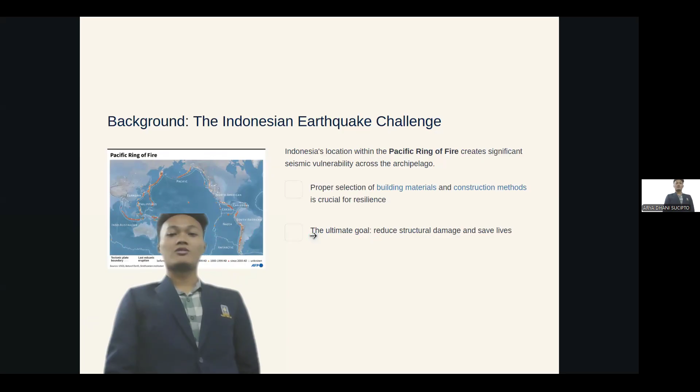Background: Indonesia's location within the Pacific Ring of Fire creates significant seismic vulnerability across the archipelago. Indonesia really has the most heavy earthquake challenge. So the proper selection of building materials and construction methods is crucial for the resilience of buildings, and the ultimate goal is to reduce structural damage and save lives.

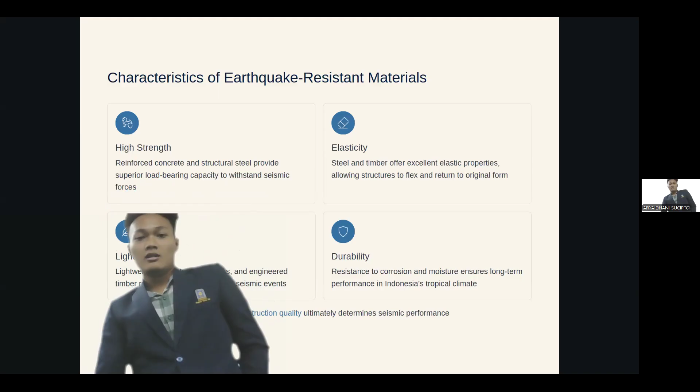The characteristics of earthquake-resistant materials: First, high strength. Reinforced concrete and structural steel provide superior load-bearing capacity to withstand seismic forces. Second, elasticity. Steel and timber offer excellent elastic properties, allowing structures to flex and return to their original form.

Third, lightweight. Lightweight concrete like AAC blocks and engineered timber reduce inertial forces during seismic events. And the last thing is durability. Resistance to corrosion and moisture ensures long-term performance in Indonesia's tropical climate.

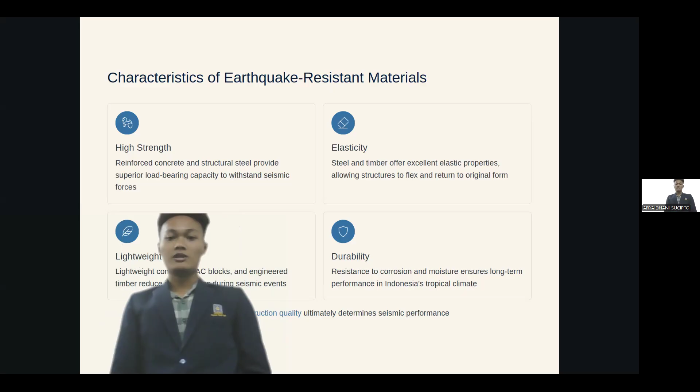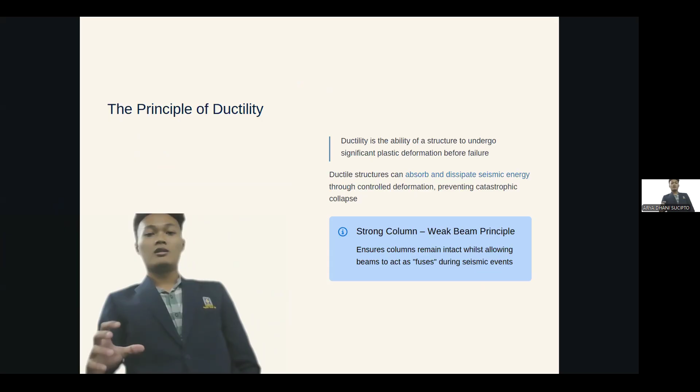The principle of ductility: it is so important in reinforced concrete buildings to have the strong column, weak beam principle. It ensures columns will remain intact while allowing beams to act like fuses during seismic events. Ductility is the ability of a structure to undergo significant plastic deformation before failure. Ductile structures can absorb and dissipate seismic energy through controlled deformation, preventing catastrophic collapse.

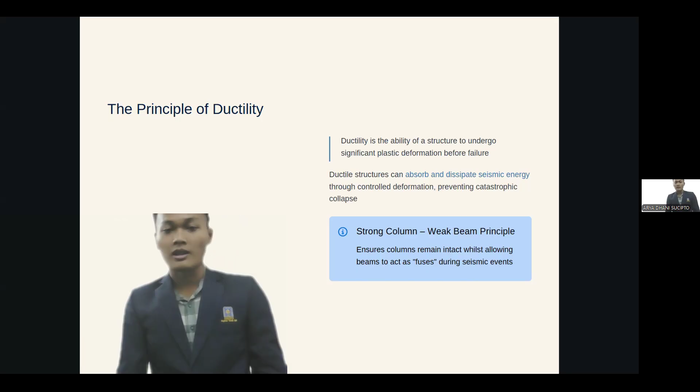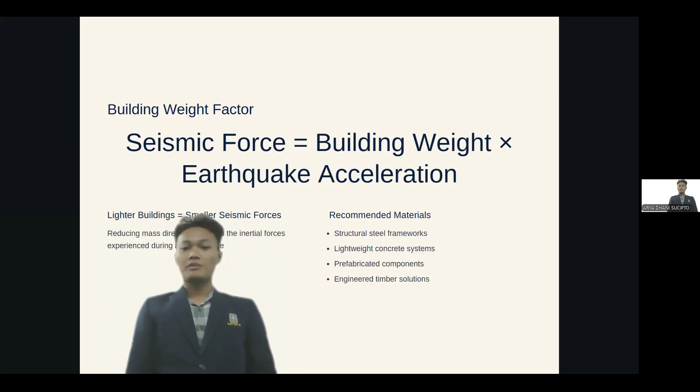Building weight factor: this equation shows the seismic force is equal to building weight multiplied by earthquake acceleration. So the lighter the building, the smaller the seismic forces. Reducing mass directly decreases the inertial forces experienced during an earthquake. So they recommend materials to reduce seismic forces, such as structural steel frameworks, lightweight concrete systems, prefabricated components, and engineered timber solutions.

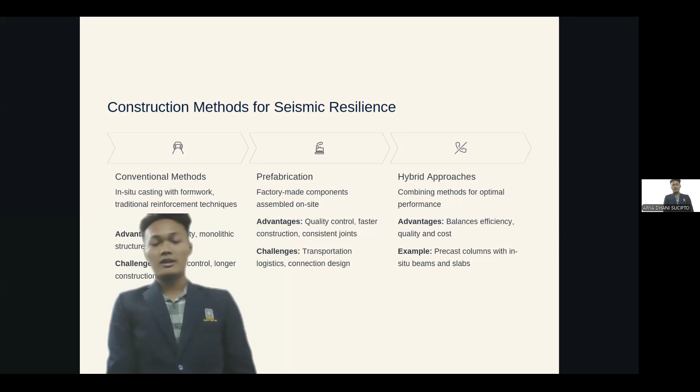The second method is prefabrication: factory-made components assembled on site. The advantages of this method are easier quality control, faster construction, and consistent joints. But the challenge is transportation logistics—it needs special transport to distribute these materials, and it has difficult connection design.

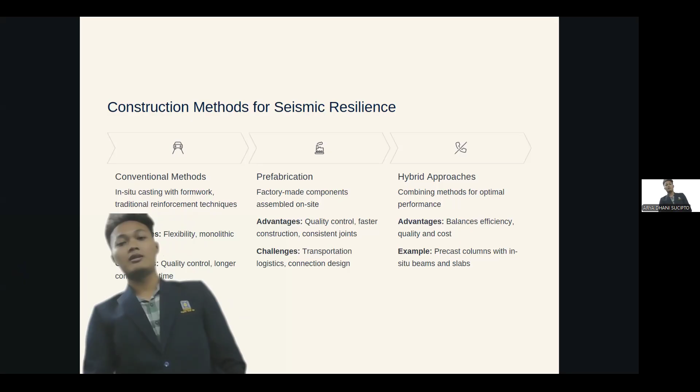And the third is hybrid approaches. It combines methods for optimal performance. The advantage of this method is balanced efficiency, quality, and cost. For example, precast columns with in-situ beams and slabs.

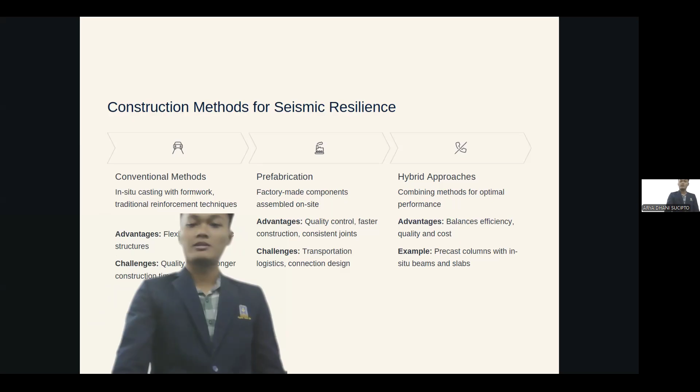Next, critical construction aspects. In Indonesia, we call it the BMW principles. B stands for biaya, or cost, which contains budget constraints. M stands for mutu, quality, material, and workmanship standards. And W stands for waktu, or time, which contains construction scheduling.

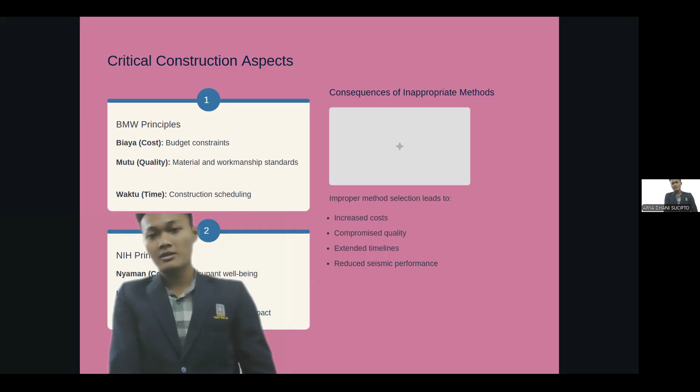And then the NIH principles: N stands for nyaman, comfort. I is indah, the aesthetic aspect. And H is hijau, sustainability and impact on the environment. Consequences of inappropriate methods: improper method selection leads to increased costs, compromised quality, extended timelines, and reduced seismic performance.

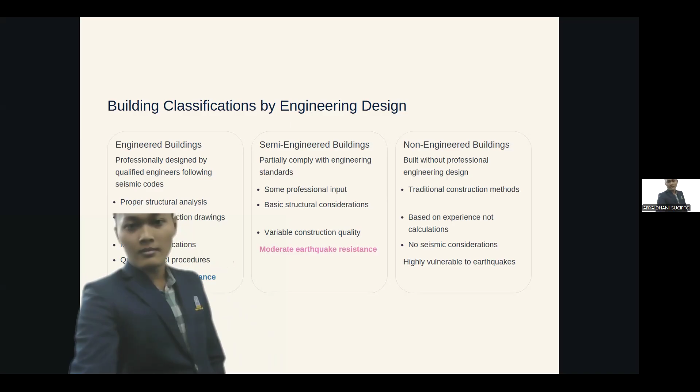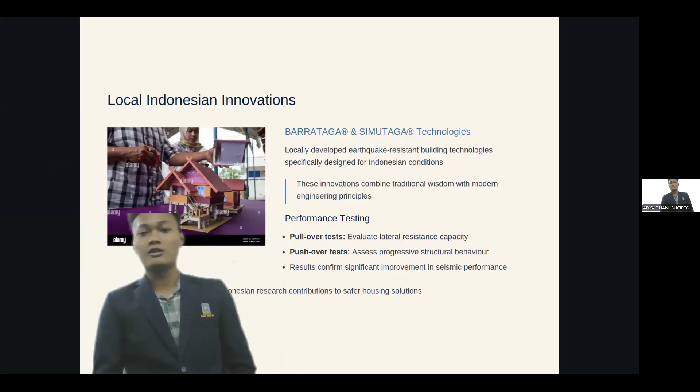In Indonesia, we have local innovations such as Barrataga, placed in Kaliurang near Merapi Mountain, and Simutaga. Simutaga technology shows the simulation of earthquakes, like moving a miniature house, to show how the house is damaged by an earthquake through simulation. These are locally developed earthquake-resistant building technologies specifically designed for Indonesian conditions. These innovations combine traditional wisdom with modern engineering principles.

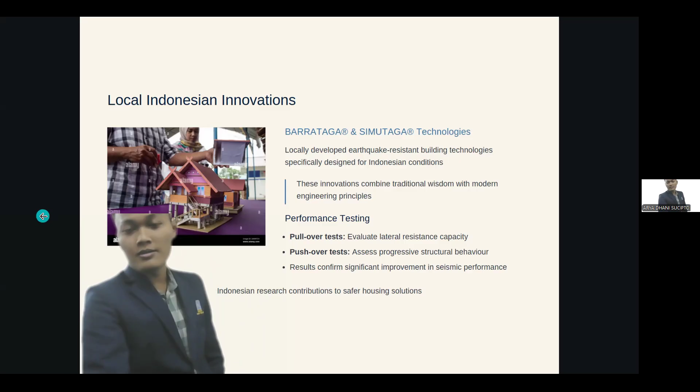Performance testing includes the pullover test, which evaluates lateral resistance capacity, and the pushover test, which assesses progressive structural behavior. The results confirm significant improvement in seismic performance. Barrataga and Simutaga were invented by Prof. Sarwidi.